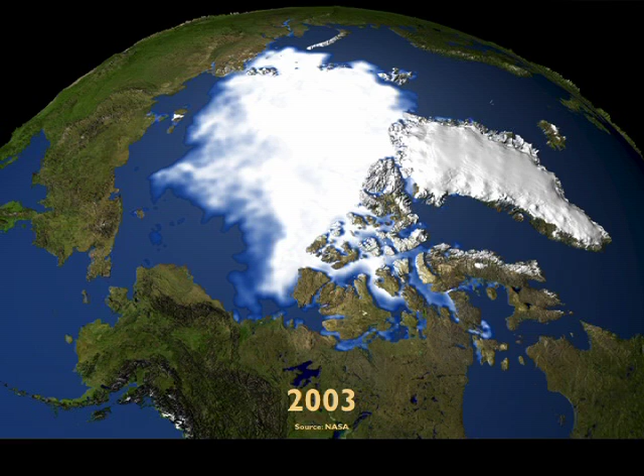It's never hurt to be aware of where we reside and the things that have happened in the last 5 minutes of the world, for which we have caused a significant amount of transformation. These are unfortunately unphotoshopped images from NASA. For many years, I didn't have the guts to actually look at a more recent image, and I haven't seen a more recent one, although I did earlier this spring look at this one here. And I'm sure hoping that this is a well-photoshopped image by Google. But it's pretty scary, isn't it?

To quote a professor of mine, Dan Janzen, MacArthur Prize winner of conservation biology, mankind won, nature lost. We've managed to actually leave our footprint on the entire globe. And at the same time, it's a very exciting time for all of us, because making us aware of the possibilities and the responsibilities that lie upon our profession is quite significant, and a great time to be alive.

We seem to have forgotten that the concept of away does not exist. Everything is here, everything is around us. We completely depend on water.

We are affecting water and its distribution on the planet at a vertiginous pace. We just don't know what's going to happen with the events three days ago in terms of the water balance around the Earth, but 17,000 planes had to be grounded because of a volcanic eruption underneath the glacier.

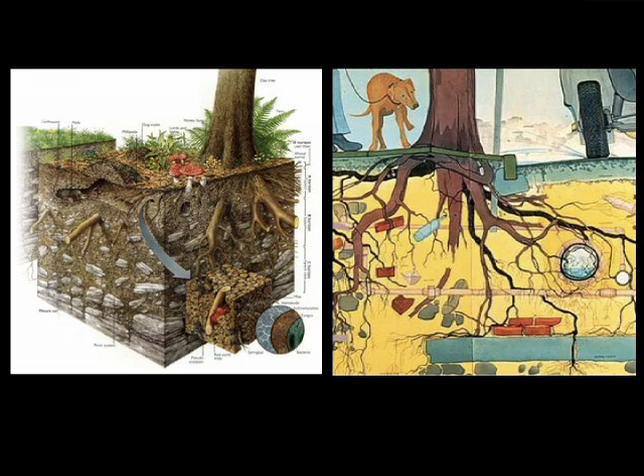At the same time, we have a significant disconnect between what that lithosphere supports, which is fundamentally most of the life on the planet, and what we do with our built environment. It's a very simple cartoon here of what we tend to see in trees, having to sustain their lives outside of this building or in our urban centers.

On the left side, we have this incredible engine of energy and recycling and production of nutrients to support life. There are millions of living parts in a teaspoon of soil, and we think of soil as dirt. We think of soil as the one thing that we can manage and move at will without regard for what happens there, and then we treat it as a commodity.

Here it is. We're selling topsoil that we've taken away from a farm, a non-renewable resource, 150 years to generate topsoil, which is what fundamentally sustains most of life on the planet in one way or another.

When we come to the building realm, in the built environment, we know buildings can do extremely well. We've heard all day today how buildings could be much better, and we know how buildings have made strides in the last 5-10 years in reducing, for example, energy use. We still have a lot more to go: carbon emissions, water use, solid waste.

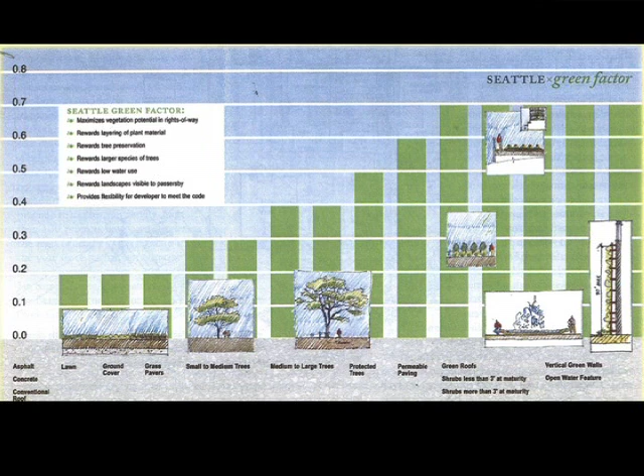There is an effort across the country to try to incorporate this idea of capturing the value of what happens outside of the buildings and making it in such a way that it becomes an incentive for cities and for developers and for architects and for the people that are capable of changing the face of the earth to be able to do better.

For example, this happens to be the Seattle Green Factor, in which the city of Seattle actually provides incentives to developers depending on the amount of green that is actually incorporated into the buildings, saving trees, providing green roofs, creating a trellis that supports vines, street trees, and so forth and so on.

It's the first movement towards trying to really develop a series of strategies that can actually contribute in some form to the definition of value for the landscapes and the sites.

You can't see this very well, but this hasn't gone unnoticed. Back in October last year, October 5th, President Obama issued an executive order asking every single entity in the government to actually pay attention to all these things.

This is an executive order that talks about federal leadership in environmental, energy, and economic performance. And if you read this, you will find out that many of the things we're trying to do with buildings and sustainable design are now part of what the government is actually asking themselves to do, setting standards that are, in many cases, much higher than current practices in our industry.

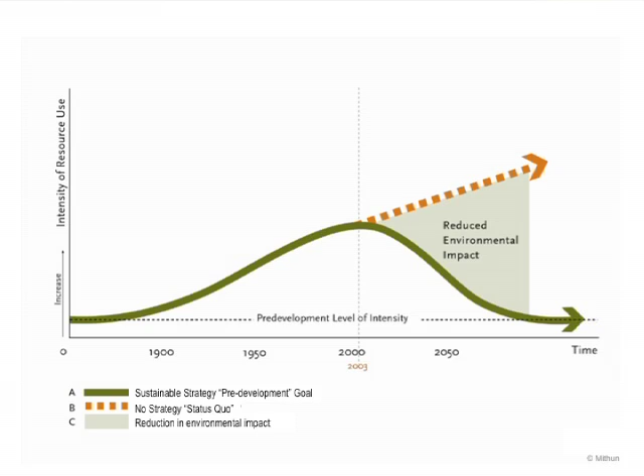So what it means is that we want to concentrate our efforts on this little wedge piece here. If we were to continue business as usual, we know that the amount of resource depletion in use is going to increase forever, and we know there's a finite amount of this. But if we were to actually look at all these reduced environmental impact strategies, we can bring that trend down. And that's where we want to focus our efforts.

When we look at a landscape, we can begin to look at it in a slightly different way. We can do our customary analysis through GIS mapping systems looking at elevation, slopes, types of soils, vegetation, and the intangibles about perceptions of the space and views.

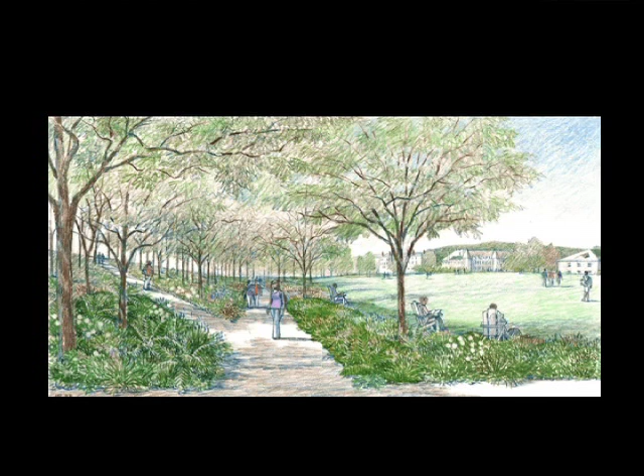We can think of landscapes as being bucolic and beautiful, or being more diverse and rich, supporting a much wider plant community and diversity, and providing different places for expansion and recreation. The Sustainable Sites Initiative recognizes that landscapes are in a position to actually capture and regenerate ecosystem services - those that nature provides for all forms of life on the planet to be sustained, occurring from mountain and polar environments all the way down to islands in the middle of the ocean. Ecosystem services can occur at any site across the globe.

And what are those ecosystem services? Well, we know about it if you read the pamphlet on the website. We have all these things that happen in landscapes that we are in a position to really capture, understand, and deploy systems that can actually replicate.

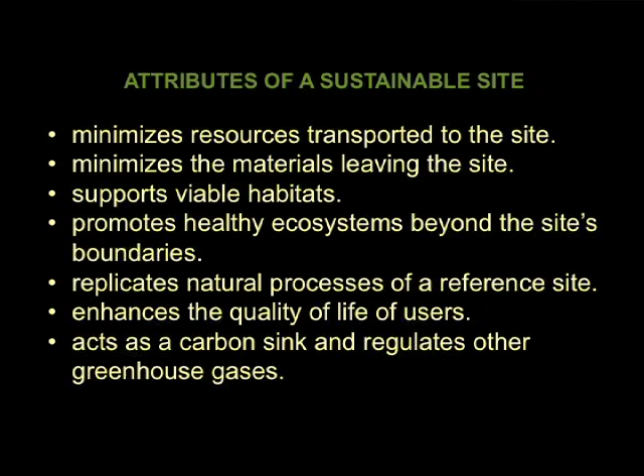So you will ask, what are the attributes of a sustainable site? If we're going to talk about a sustainable site, it will be one that minimizes the resources transported to it and minimizes the materials leaving that site - in other words, it recycles as much as possible. It supports viable habitats and promotes healthy ecosystems beyond the site's boundary, because it's not actually acting by itself - it's part of a significant web.

It replicates natural processes of that reference site in case the site has been degraded. We know what the site offers in other undisturbed places, and we can try to begin to replicate that. It enhances the quality of life of its users - there's a human component here - and it could perhaps act as a carbon sink and regulate other greenhouse gases.

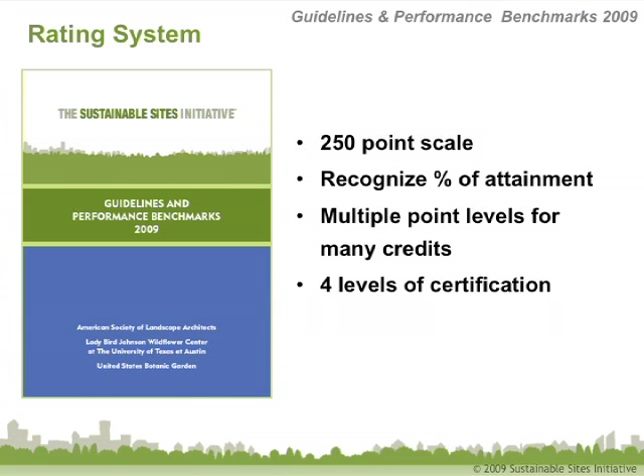So the Sustainable Sites Initiative launched a rating system for sites and landscapes back in November 2009, where there is, similar to LEED, a rating system with 250 points and 4 levels of attainment, with multiple point levels for each one of the credits.

The credits are organized in the way you conceive a project and execute it - from the early phases with site selection and pre-design assessment, through credits dealing with the design component including site design for human health and well-being, material, soil, vegetation, and water, credits connected to the construction process, and then operations, maintenance, monitoring, and innovation.

There are a total of 15 prerequisites and 51 different credits, all weighted on different scales. The soil and vegetation category, the interface between plant, soils, and water, has the largest number of credits. We went back and forth a great deal - this is the product of 5 years' worth of work, now in the pilot project phase. There are a number of prerequisites required; you simply have to meet these in order to become a rated sustainable site.

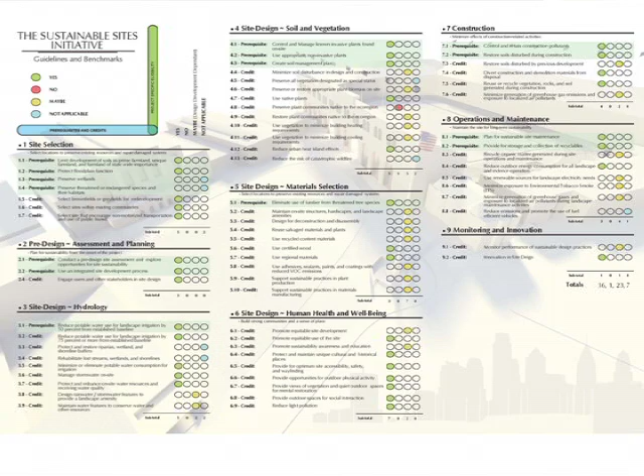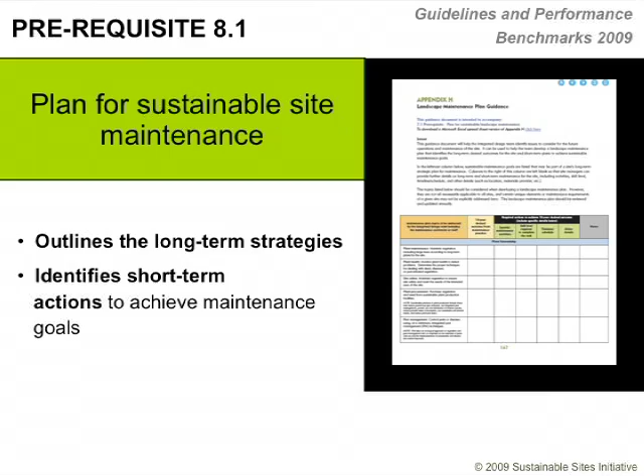So I will just briefly talk about a couple of the prerequisites and a couple of the credits, and then we'll talk about three projects: one built, one under construction, and one under design.

As I mentioned before, one of the prerequisites is the Plan for Sustainable Site Maintenance. If you go to sustainablesites.org, you can download a 300-page report with all this information telling you what you need to do, including the forms and so forth.

An interesting credit here, in terms of human health and well-being that speaks to social equity, is one that rewards projects that look at the way wage distribution occurs under the building's contract. We want to encourage that the majority of jobs each project generates remain in the local community, and at the lower levels, so we can affect the largest number of people. In this case, economic equity and social equity come together.

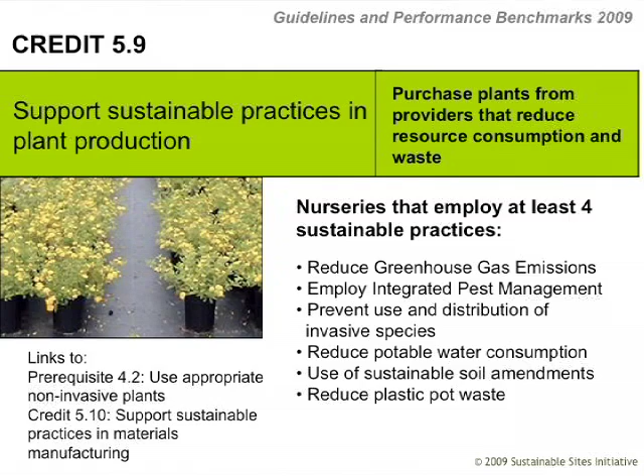At the same time, we want to make sure there's accessibility through a project that provides amenities accessible to the communities, support for sustainable practice in plant production, support for sustainable practice in materials manufacturing, and credits that monitor the performance of sustainable design practices.

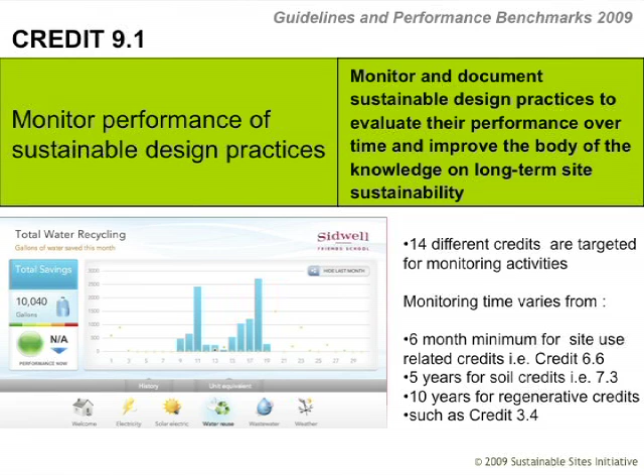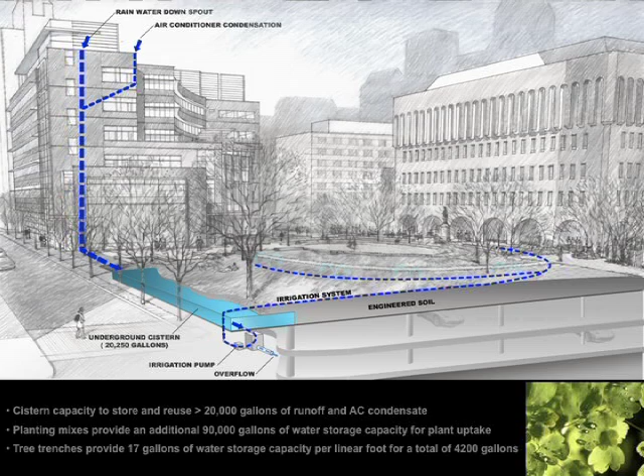What this project does is take the building and use it as a catchment, capturing all the runoff from the roof—the cleanest water on the site—along with the AC condensate, down to a cistern that provides irrigation to support all the living systems on top of this plaza.

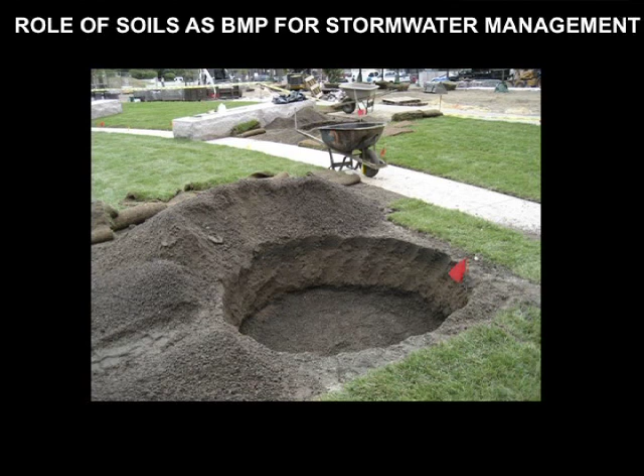It uses soils that are 100% man-made, manufactured as the best management practice for stormwater management, where we can model the amount of water retained by those soils and avoid that rainwater going into the combined sewer system, which would create problems with raw sewage discharge into the Delaware River.

Here are some photographs of the project under construction with the excavation happening, and everything from this line to the west, or to the left side, is actually on top of a parking garage.

It's designed so that it could be used at night with a tent that provides shelter for university activities, and it's used frequently by the community.

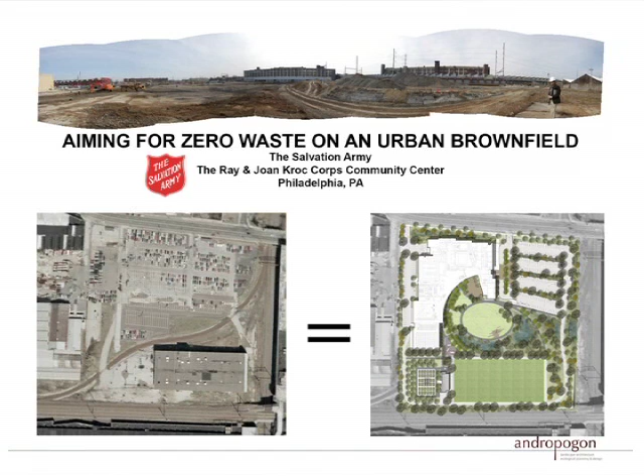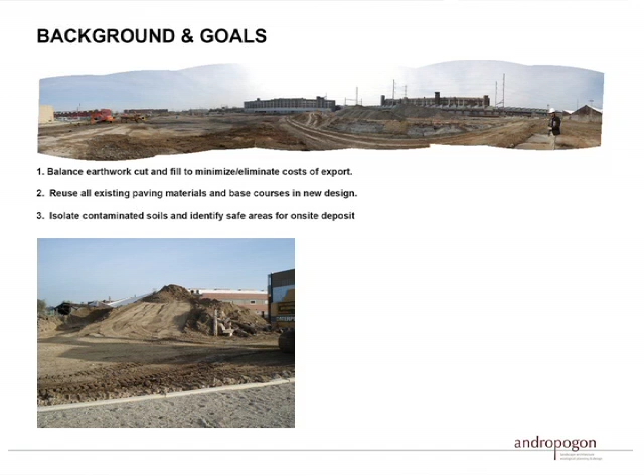Going to a brownfield, also in Philadelphia, the idea is to create a project that has zero waste. This is an 11-acre site, a new community center for the Salvation Army. The idea was to inventory everything existing on the site and try to find a way to upcycle those resources.

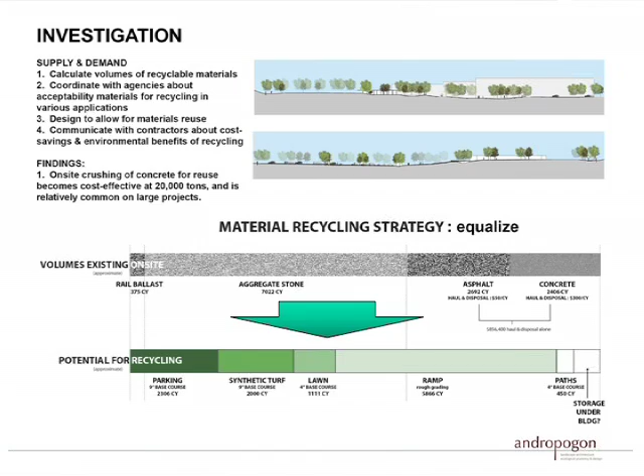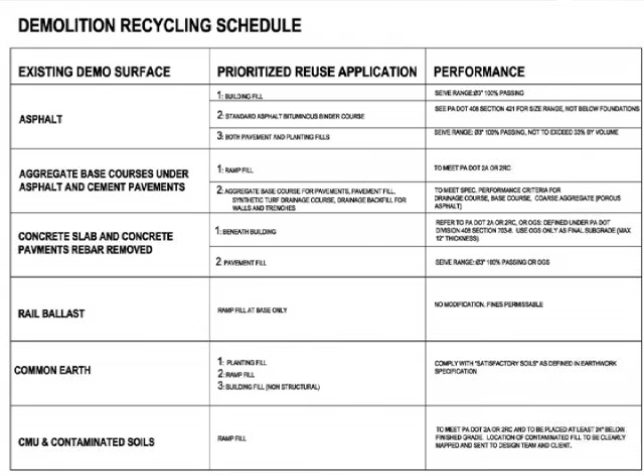So we looked at the supply and the demand, what is available, what do we need to use, and in which way the existing materials can actually become part of the new fabric of the site to support the new activities. We went through a series of strategies determining the type of recycling schedule and the standards that need to be met for the different types of operation.

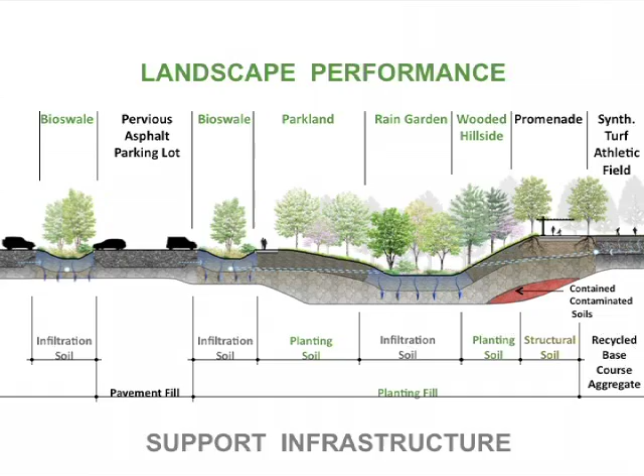Look at cut and fill calculations that you can do very crudely with yellow trace and colors, or you can be very sophisticated with computer models. Adjusting the profile of the site so we can end up with a supporting infrastructure that recycles most of those materials, which then supports a high-performance landscape that manages water and provides amenities for the site.

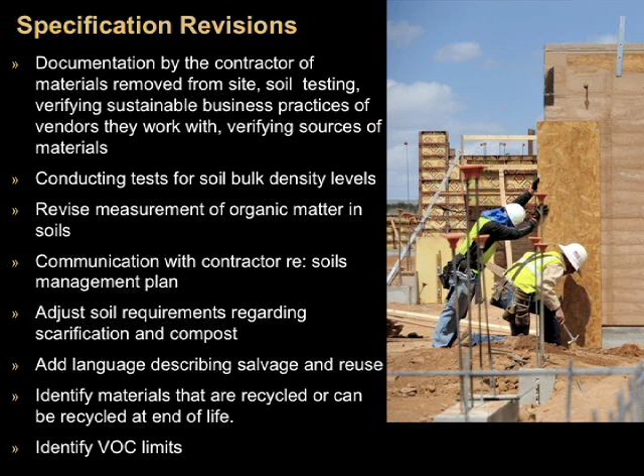And the result is that we use 100% of the materials we recycle on the site. We ended up with a very low cost per square foot, $19 per square foot for site development here. We don't know exactly the savings, but we know that we saved at least $300,000 in hauling and tipping fees for taking this out.

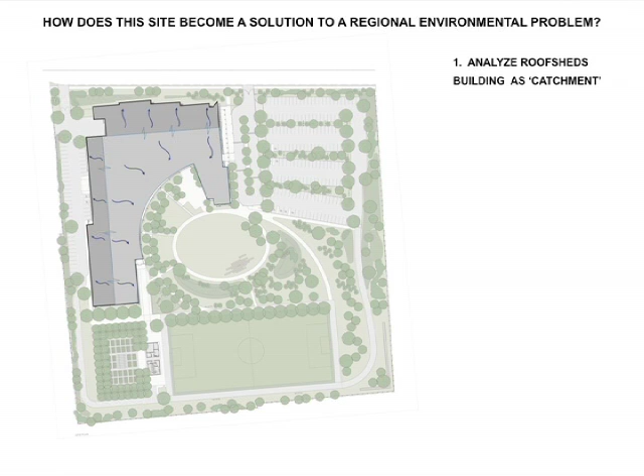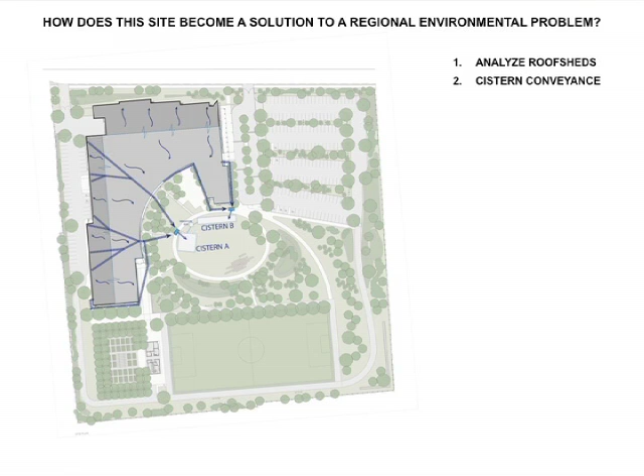So we look at the project in terms of the building as a catchment. It's almost 2 acres of roof surface, conveying that runoff through a series of cisterns that can direct that rainwater for irrigation, exhibiting that water in a series of surface runnels, so people are aware of what is happening when it rains, or aware of what happens with the air condensates inside of the building. And then that informs the entire landscape with a series of rain gardens.

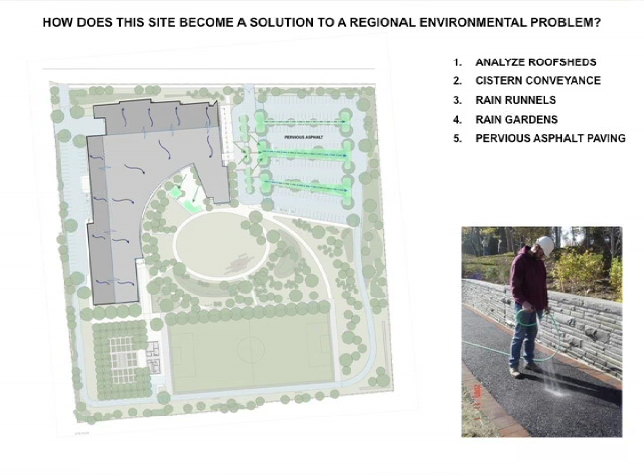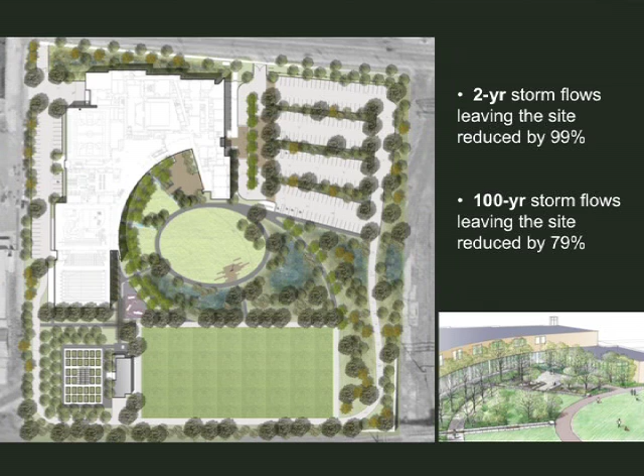And then the parking areas necessary to support this facility are paved with pervious asphalt to minimize the amount of runoff generated by the building. So 99% of the storms are retained on site for the 2-year storm or less. This occurs upwards of 92% of the time. For the 100-year storm, we reduce the flows coming out of the building, out of the site, by 79%.

And lastly, a project that is an interesting challenge is a brownfield renovation in Pittsburgh for the Phipps Conservatory. It is a project that has challenged itself to meet the Living Building Challenge. I don't know if you are aware of what this is, but it is the next level beyond LEED that is now out there for people to meet. There are 16 prerequisites - you either meet them all or you don't meet the challenge. There's no way to get points here and there. You have to meet all the prerequisites.

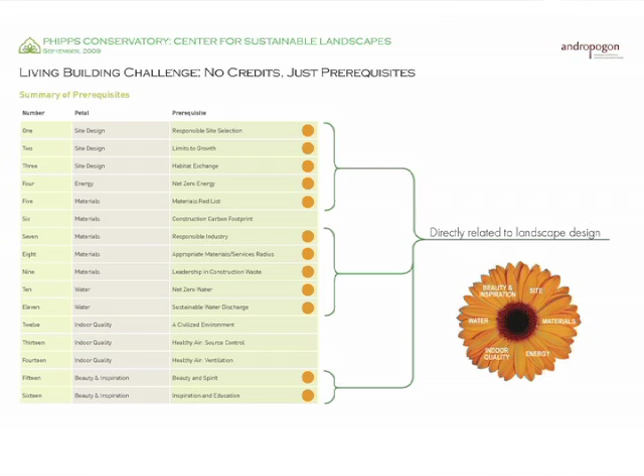And what we find interesting about this Living Building Challenge is that of the prerequisites, there are 12 that are directly related to sites and landscapes. If you look at the LEED rating system, if you obtain all the water and site credits, you can actually get a building certified - and it's sort of hidden in the background there. But in this case, this project is built on...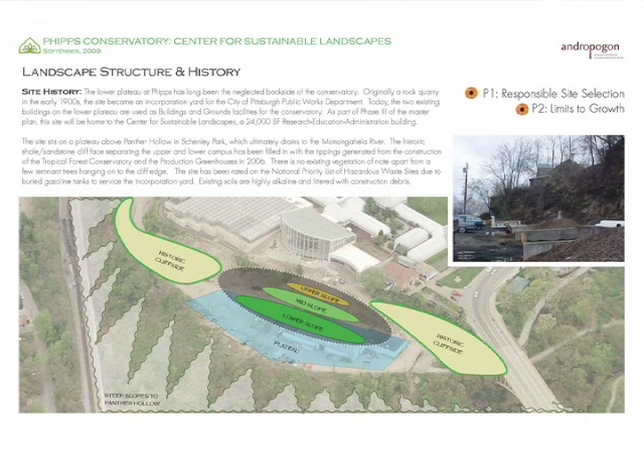This landfill, which has been used for storage in the facility. We went through extensive charrettes with users, community members, and the institution, as well as many members of the design community in the city of Pittsburgh.

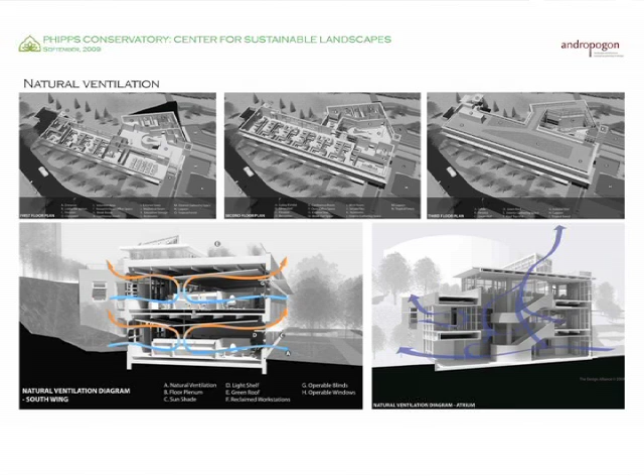We ended up with a building project that has to be net zero energy, using a combination of different energy sources, many renewable strategies with solar photovoltaic, ground coupled heating systems, where the building is being designed to maximize daylight and natural ventilation as to reduce the amount of energy consumption, where every surface of the site is actually playing a role in contributing to the...

It is a site that is completely restored from scratch, because it doesn't exist there right now, with a series of walkways to accommodate a significant change in grade from the upper plateau to the lower plateau, about 3 stories high. At the bottom of it there is a water feature that is modeled after a natural lagoon swimming pool, which you see here.

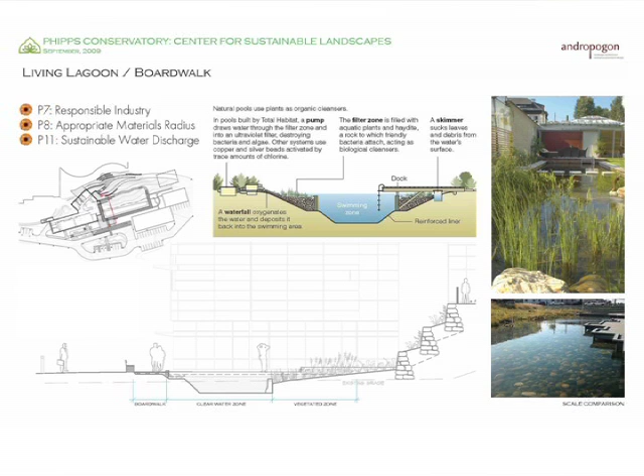All the filtration of the water is done by living systems that are hosted by plants and roots and stone media, and then there's a filtration mechanism that takes the water through all these planted reeds and wetlands and actually cleans the water.

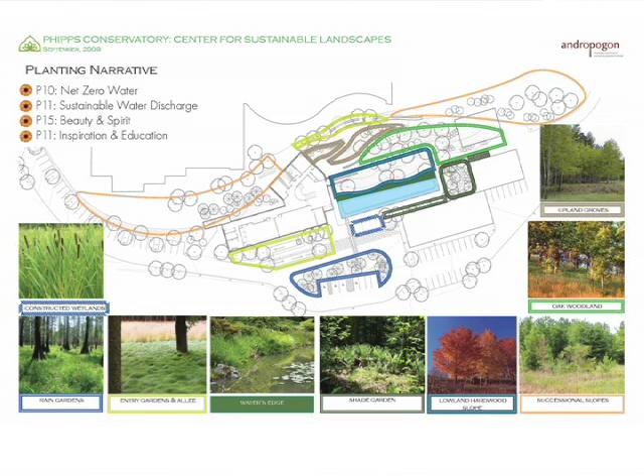This is a system that has been utilized in Europe for many years, and it's becoming more common here in the United States. There's a narrative for the landscape, where it's actually restored to appropriate plant communities depending on where they're located on the site and the performance required. To support these landscapes, we need a soil management plan, which is one of the credits we need to comply with for sustainable sites.

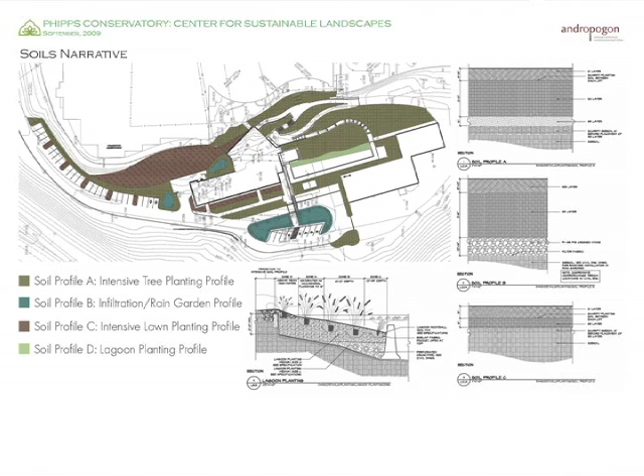This project, I failed to mention, is a pilot project for the Sustainable Sites Initiative. To do that, there's a series of areas delineated on the site with very tightly crafted specifications for performance of the soils deployed in those areas, which will be planted in different ways to support a whole variety of plant communities.

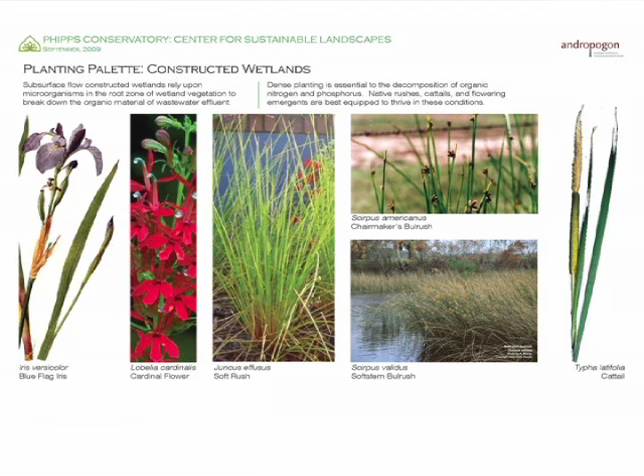This one happens to be at the water's edge, along the rain gardens, with different plant material for the constructed wetlands that will clean the wastewater, the woodland gardens, and at the ground plane, alkaline meadows—areas that are very hot and dry, tending toward high pH. In landscapes we don't talk about HP or high performance landscapes, we talk about pH, whether it's high or low, but we're all going to the same place.

Then there's this inspiration and education prerequisite that the project has to have, where we created outdoor spaces for enjoyment and for outdoor classrooms and so forth.

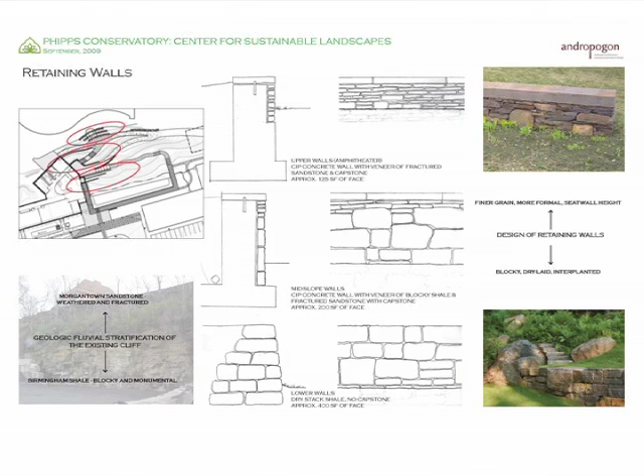One last important aspect is that we talked about the sense of place. The sense of place is about how, over the years, this site has actually developed. If you look at the way this cliff has developed, there's something very important about how the rocks are actually stratified on the site.

To reflect that, we have a series of retaining walls that actually mimic the way the materials come out of the site, from less decomposed rocks and blocky shapes and forms at the bottom, to more stratified systems as the weathering occurs. So this is only about this cliff in Pittsburgh, and nowhere else on Earth.

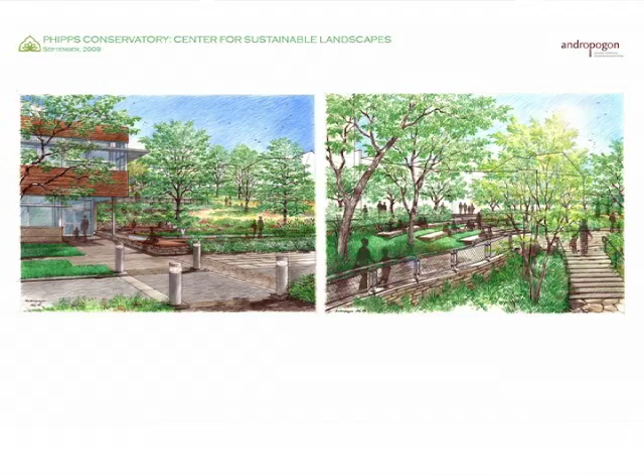Next, right? No, Jason Smith.

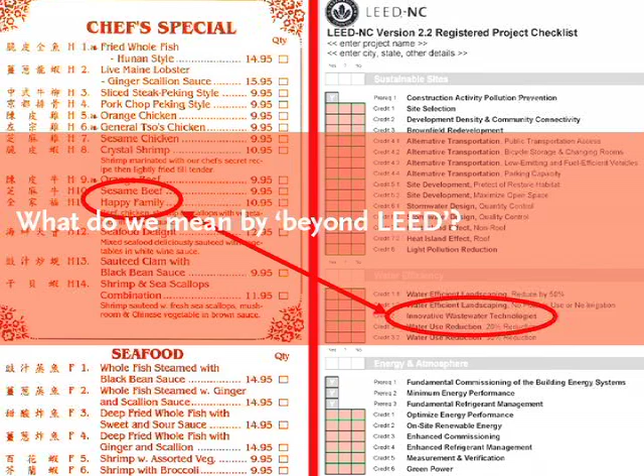So the initial question is, what do we mean by beyond LEED? I was really pleased to hear Malcolm talk about the evolution of LEED that's forthcoming. And LEED has developed, for better or worse, into an approach much like a Chinese menu. I'll take a little bit of this, and a little bit of that, and I'll put it all in a brown bag, bring it home, and it'll be called a meal.

So whether you're picking from the Happy Family menu or picking from innovative wastewater technologies, I think all of us in this room can agree that beyond this, there's a broader and more holistic goal.

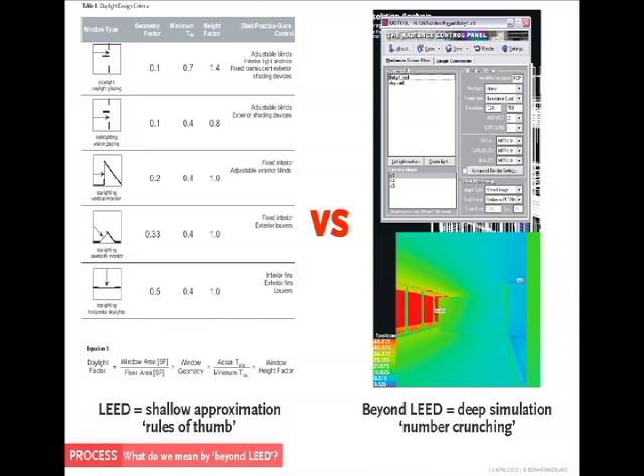Now, the way we approach that goal in our practice is that we take LEED as a starting point, and we speak about it as a good initiation for shallow approximation. And for years, for decades, for hundreds of years, the quantification of data in our profession—whether it's architecture, engineering, landscape architecture, civil design, or structural engineering—all had to do with these rules of thumb.

We all learned them in school. We all learned how a beam acts as a structural engineer, or learned similar facts in any one of those other professions. LEED takes and capitalizes on those rules of thumb in a way that makes them more palatable and more digestible. That's a thing that has brought, as Malcolm suggested, LEED and environmental design into the human consciousness on a much broader scale.

But frankly, we believe in moving beyond LEED through deep simulation. Simulation of the way our buildings work and operate is something that Steve and Dave and others can talk about on the energy side in a much more informed and intellectual way than I can. But we believe in propagating that through the early phases of design, so we try to understand the predictive elements of our behavior as designers and as building users through a series of simulations and number crunching, if you will.

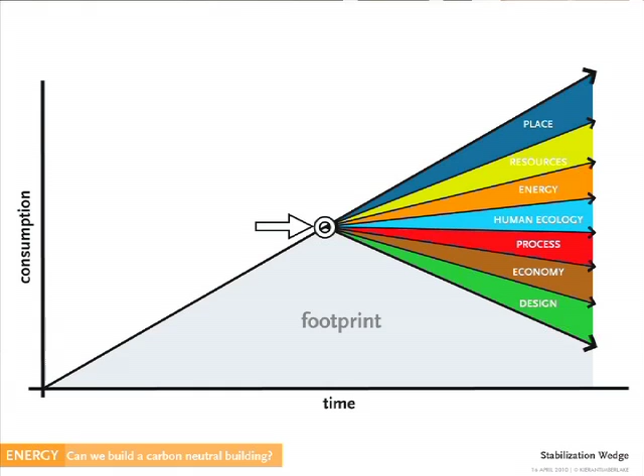So can we build a carbon neutral building? We think about this as a series of wedges. Any search towards carbon neutrality or zero energy can't be done by one thing. Frankly speaking, a building itself can't be carbon neutral. We couldn't construct a building of any sort—unless we gathered sticks and stones and piled them on top of one another without any glue, adhesive, or mortar—that was completely carbon neutral.

So one of the things we talk about is: what can we do through design? But these other wedges—place, resources, energy, human ecology, process, and economy—all bring us incrementally closer towards a more perfect and carbon neutral building landscape site.

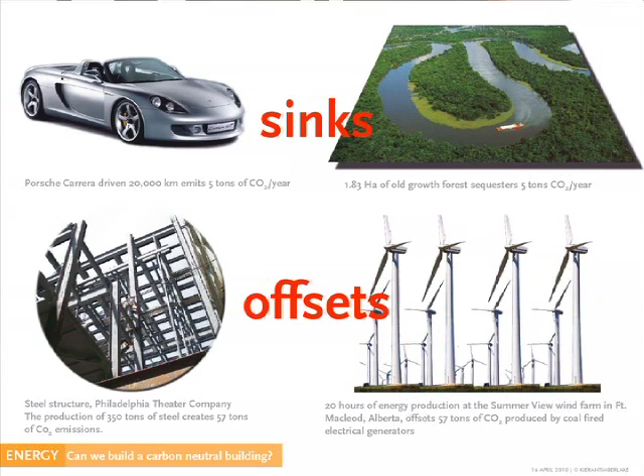Now, how do you do that? Well, one of the ways is through design. The other way is through external factors. So, a giant energy-hogging, carbon-spewing car like the Porsche Carrera essentially emits the same amount of carbon dioxide as we can sink in almost a 2-hectare swath of old growth forest. Is that something that's really sustainable for us? Is it sustainable for us to drive those kinds of cars? Is it really sustainable for us to offset those sorts of things, to sink those sorts of things?

At the same time, we look at a structure from a project we did in Philadelphia, and the production of the steel structure, which in our area of the country, like most areas, is done by coal-fired plants. How do we offset that with off-site usage? How do we look at what it takes? So 20 hours of energy production in a wind farm is actually something far more attainable in our current environment than starting to dedicate old growth forests to sink carbon. So we start to look at these as a multiplicity of strategies.

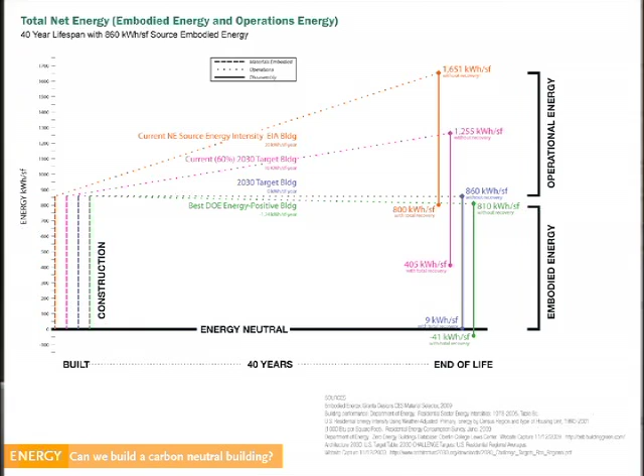Now, how do we do that in the built environment? Let's just say, like others have today, that we're going to design a building that's going to last for 40 years. The building in and of itself has this much embodied energy in it. We can improve on it. We can use lower embodied energy materials, lower site process materials that use less energy, and we can transport less. But we're still going to get to a point where we're never going to be able to build a building that doesn't have X amount of embodied energy in it.

The rest of this, with various benchmarking attached to it, is all about how well your building performs after you sink all that embodied energy into it. Is it a zero net energy building? Does it give back to the grid? Is it just an average building? Does it hit the 2030 target? These are various ways that we can quantify how our operational energy builds upon our embodied energy.

But importantly, and this is something most of the building community doesn't reflect on, is how do we recover that embodied energy at the end of a building's life cycle? It's something our practice has been really focused on, and it routinely builds for folks like Dartmouth who want buildings that last forever. We still ask how do we recover that energy, because we'll never get to what we call energy neutrality if we don't understand how to recycle, repurpose, and reuse buildings and their constituent parts at the end of their lifespan.

So operational energy is really only half the problem.

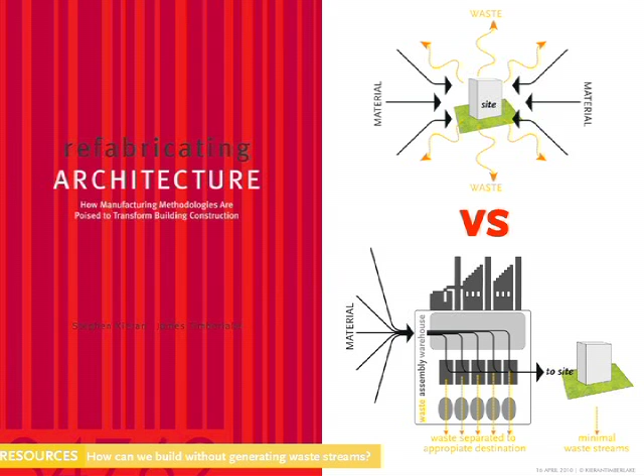So we wrote a book about this that reflected on other industries far less primitive than building design and construction—industries that, for economic circumstances or for the sake of their very survival, found new and better, improved ways to build. Almost universally, those industries built in one way: they haven't built with pieces and parts, they've built with larger scale modules. Some industries call them chunks, some call them modules. It's an approach that in the last decade we've sought to understand as it pertains to buildings.

What it means is that in a conventional building construction, all these different things come to the site—in all sorts of trucks, all sorts of dollies—people unload and offload them, and then all this waste goes out of the site. It's a completely uncontrolled environment, even in the best of circumstances. So we seek to adopt the methodology that the airplane industry uses, the shipbuilding industry uses, and other vertically integrated industries use: bring the materials to a centralized location, control the waste, and control the streams that move off that location in a much more elegant way.

Now, if we build buildings and design landscapes, we're never going to be able to do that inside a factory vacuum. But what parts of the building, what parts of the landscape, can we contain in a way that's highly controllable and minimizes our waste?

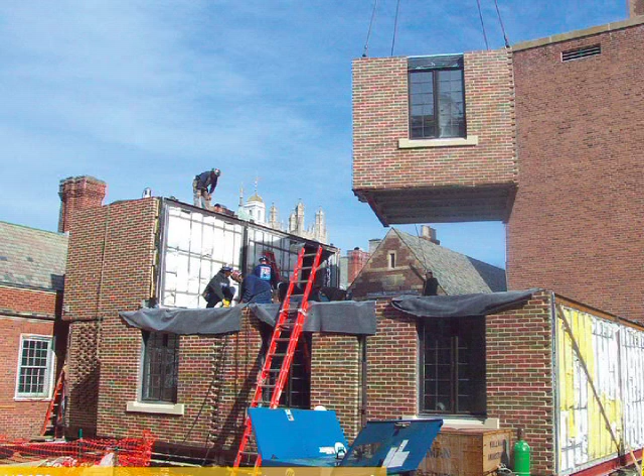I included this slide to make everyone aware that this isn't just tin buildings we see outside. We've had the privilege of working with institutions that want to push this far enough—and I should recommend this to Dartmouth—that actually brittle masonry buildings can be built this way. It's a structural steel frame imported in large chunks, and the building pieces are knit together, as at one of the other Ivy League institutions.

The other way we do that is how do we do it locally. As practitioners of the art and science of architecture and design, we're used to going through a catalog and saying, I want this, this, this, and this, and we don't really know where it comes from. Well, how do we integrate that, and how do we work with our clients?

Jose and I have enjoyed a long and collaborative relationship on projects at Middlebury and elsewhere. For folks like Middlebury and Dartmouth who are looking out more broadly at their own land holdings, we understand that we can be using those things inside the building.

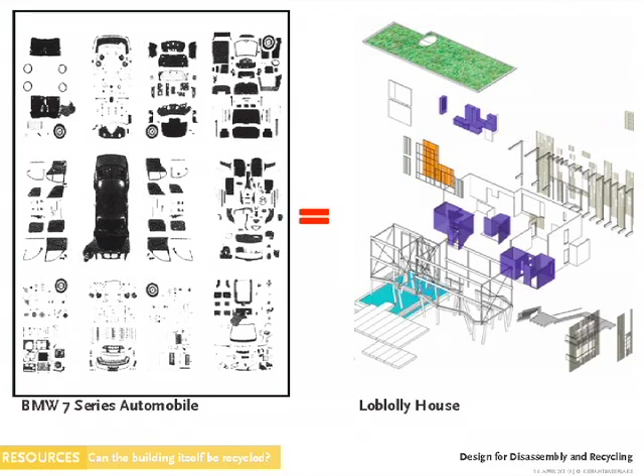And then finally, again, how do we look at the building itself being recycled? How, in the end, do we understand that the building itself can be recycled, and we can grab back the embodied energy that's gone into the building and not just minimize the operational energy?

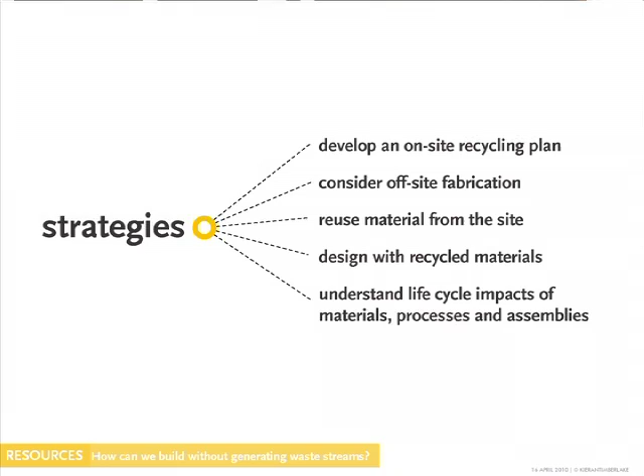So many of these strategies are going to be familiar to folks: developing a recycling plan, considering off-site fabrication, because it dramatically reduces—by 80 plus percent—the amount of waste that comes out of a construction site, reusing materials from the site, as Jose mentioned, designing for recycled materials, and then understanding those life cycle impacts. Important question that we ask all of our clients: what do we mean by here?

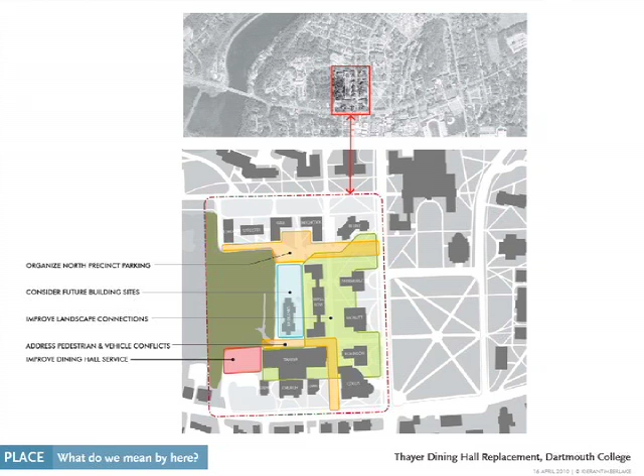So the first thing is, where is the climatological data, and what can it tell us about what we can do? For a project we worked on in an earlier edition of the Thayer Dining Hall, we started off with Jack and others' assistance looking more widely at the precinct, looking at the larger swath of New Hampshire and even Vermont that the college occupies, and then developing that into a precinct plan so that we could identify not only the typical architecture and urban plan issues that you see highlighted here.

But also relationships in and among the entire campus network. So how do we define here by that? And then when we started—

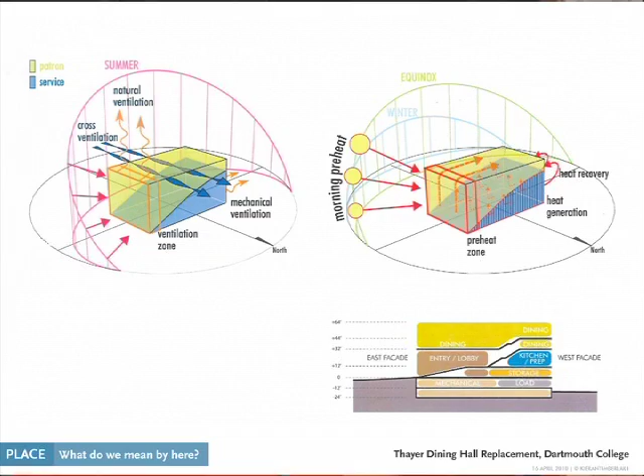Programming the building, we quickly came to an understanding that we could hybridize the program together with the environmental data, together with the sense of place. And so in a pure stacking diagrammatic way, we knew that we had a building, to use Dave Madigan's terminology, that'd be a big energy hog.

Thayer, even the most improved Thayer Dining Hall, is still going to use a tremendous amount of energy to do what it has to do.

But we looked quickly and rigorously at how we might develop a stacking diagram to suggest that the orientation of the building and the constituent program of the building, and the climatological data that we knew about here in Hanover, quickly suggested that before we came to a building design, we knew programmatically what we had to do in order to organize the building.

As an example, we knew that during the summer, we would need to seek shade, because in the early part of the day the building would face the intense eastern sun, while in the winter, we wanted to try to capture that heat.

So the design of a thermal transfer wall that would be a modern improvement on the classic trombe wall—one that would gather the heat in the winter and release it to the building, and gather the heat in the summer and release it to the atmosphere—was the initial starting point.

The programmatic stacking diagram allowed us to take heat-generating spaces, i.e. the kitchen, and stack them below heat-receiving spaces, at least for most of the year. That also allowed us to develop a symbiotic relationship where one part of the building generating a tremendous amount of heat is feeding another part of the building that wants to receive that heat. So we try to do that as part of the early and pre-design effort.

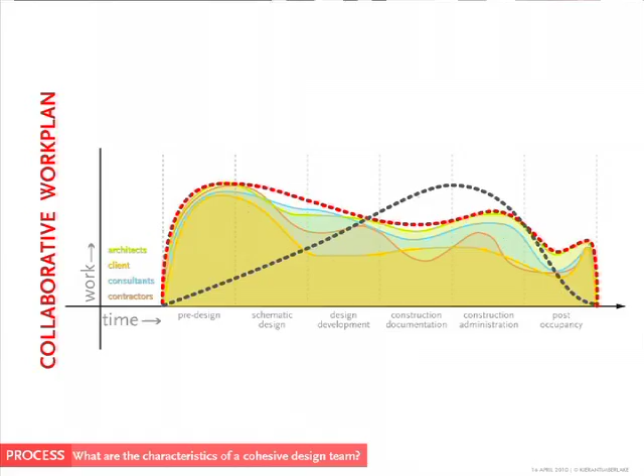Everybody is trying to work at the very last minute to try to get a building designed and constructed. We propose a paradigm that's much more in equilibrium, in which architects, clients, consultants, contractors, and all other user groups are fundamentally drawn together at the beginning of a process, in that pre-design phase, to work in a participatory manner, so that the hump in the curve is not back here, but here.

And then the net benefits of that accrue to the rest of the project. So front-loading work in the front part of the process is integral to the approach.

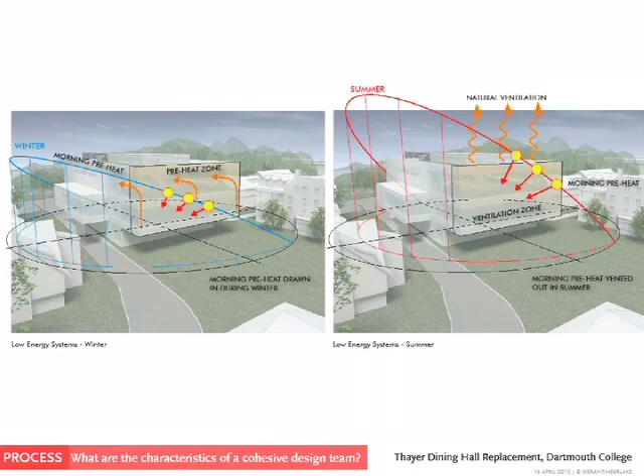So how does that work in the same Thayer project? Well, we knew that we had an opportunity to use this preheat zone in a passive way in the building, but we also knew that the building would be filled with active systems. Like science buildings, the reason these buildings are so energy consumptive is because you have air that's constantly moving through them to evacuate the kitchen and hood equipment, especially in a large dining hall.

So we worked with Dave and others to try to understand how we might use those same strategies I talked about, but in a way that was more broadly distributed through the building system. We were tremendously excited about this building to be able to accomplish a dining hall with operable windows. Sounds simple, but it's not something that's done conventionally, because of the air requirements and because of the temperature control requirements.

We also, much to the chagrin of some at Dartmouth, built a vertical building and tried to take advantage of the natural effect, both the stack effect and the natural ventilation effect, in order to bring this building into a full ecological circle that includes human ecology.

So we exchange information with our consultants in that way early in the process and often in the process. We seek to develop long-term relationships with our clients and with our consultants. And I think all of us on the design side here understand the value of that, not only economically, but also from a project teaming respect.

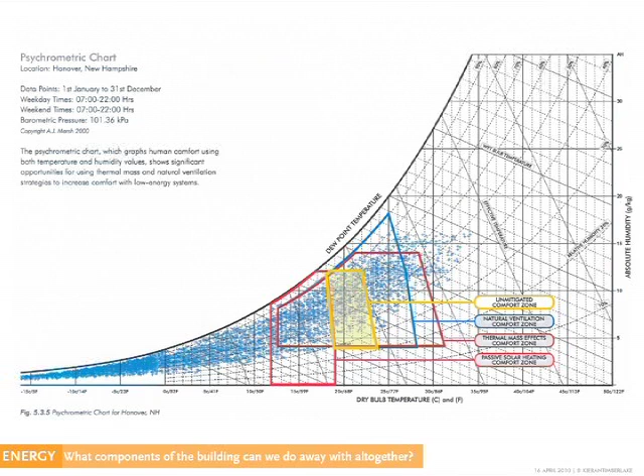Similar to psychrometric data, in this case from Hanover, you can see most of the time is in the heating zone, and most of the passive and active strategies that are low energy can capture most of the temperature comfort data points. But what happens when we extend that out more broadly?

These are buildings that, under normative conditions, because of Middlebury's really active and world-acclaimed summer language program, have air conditioning as a de facto circumstance. They're bringing people from all over the world, including people from much colder areas and much hotter areas, and putting them together in an environment that's essentially sealed from the outside in a Middlebury summer.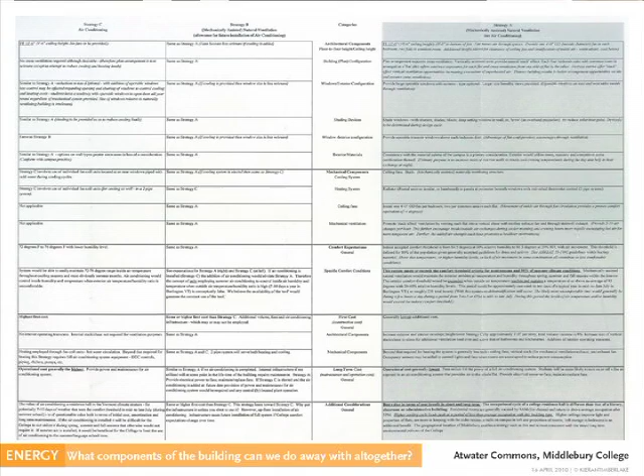So we started to ask questions about how we can improve on that, and whether we can do away with this fait accompli that was air conditioning, and how to do it in a way that is exhaustive in terms of its research, but also appropriate in terms of the user group.

So simply speaking, we started with an argument about spatial economy. All of the room that air conditioning in these buildings takes was costing X amount of dollars and X amount of energy to run. We developed a simple sectional diagram that didn't have anything to do with the plan of the building, but realized that flow-through natural or mechanically assisted natural ventilation would be spatially much less consumptive than any diagram that includes chillers and air handlers and the ventilation requirements.

We then designed the plan of the building to reflect a flow-through ventilation system so that these ensuite arrangements can be opened in a cross-ventilated way.

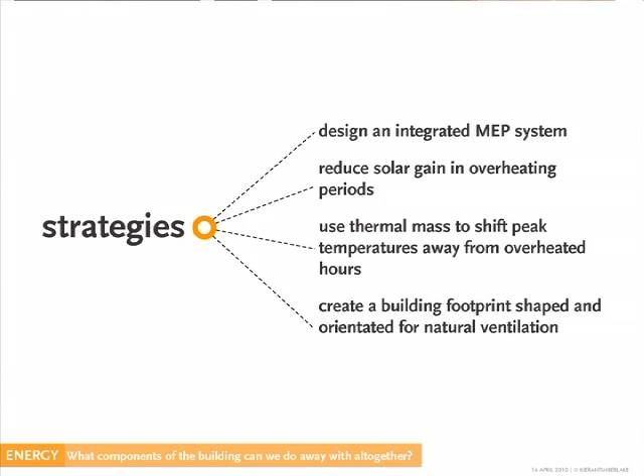So speaking of that integrated design, the MEP system doesn't always have to start with the things that you know. It can oftentimes start with the things that you don't know. The more practical things about reducing solar gain, using thermal mass, and creating a building footprint shaped and oriented for natural ventilation are things we've forgotten as a design profession. Simple strategies about orienting buildings and the systems we use are things we're bringing back to the fore.

How do we measure that performance? Here's a simple diagram that the folks from SLC will probably be familiar with: standard practice, which we're trying to get away from, best practice, advanced practice, and then cutting edge practice, or you might say regenerative practice.

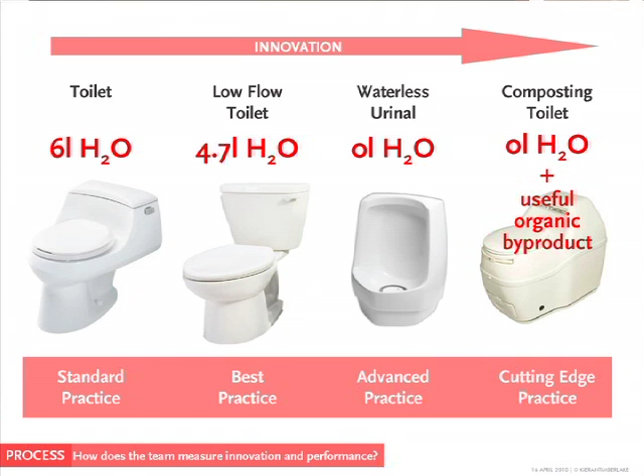And in order to measure that, we use tools that are not sophisticated to many of the user groups here, but tend to be fairly straightforward from an architect's perspective.

This was another piece of the Middlebury project where we were trying to identify the backup wall system. The folks at Middlebury were concerned about issues of condensation as they related to a structural steel and infill stud metal frame, so we designed an elegant analysis and a supremely inelegant analysis.

The elegant analysis was done by architectural testing in York, Pennsylvania, and it modeled the dew point, condensation factor, and temperature profile of the anchors, which happen to be those Fero anchors that Jason mentioned earlier from Canada.

And then in our own very primitive way, we sought to improve upon that by actually insulating the anchors themselves. So, looking outside the box, from a tool set that suggests there's one set of data, but then from a model set that suggests there's a second set of data.

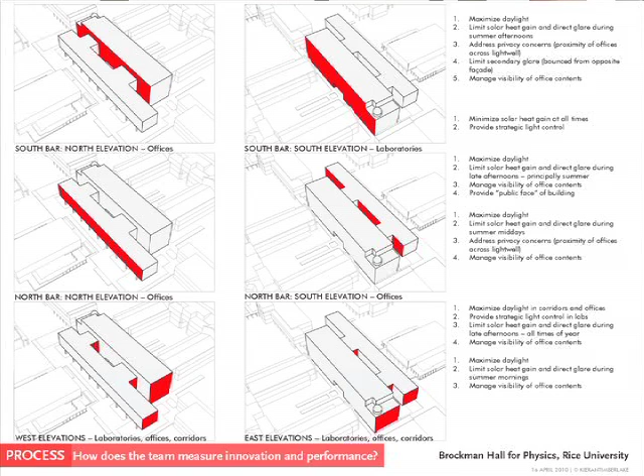Similarly, for a project I'm working on in a very different climate in Houston, Texas, we look at the building facades both integrally and individually, and set goals for each facade. In the same way Jason talked about the window-to-wall ratio, we're looking at other issues about how to construct each facade and the entirety of the building envelope in a way that's comprehensive but tuned to the local microclimate.

So we use all sorts of different tools, some sophisticated, some primitive. We measure on multiple scales. We use science, or as close to science as we know, which is to say we put out a hypothesis and then try to go about experimenting and proving that hypothesis before the building is built.

Others will come along after the building is built and be able to prove whether we were good or bad about energy intensity. But testing that hypothesis before you actually get to it is really, in the true sense, experimentation.

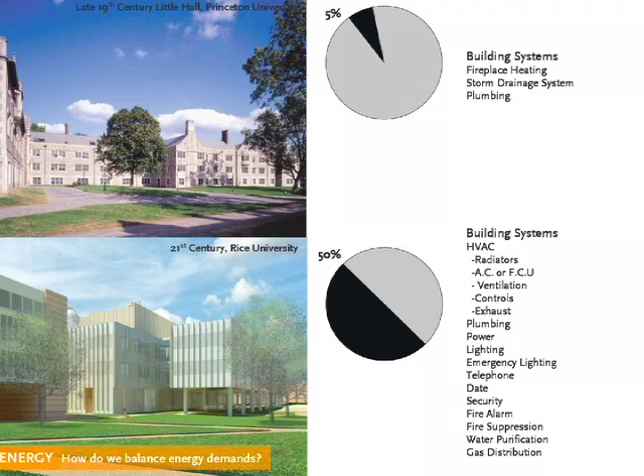And then how do we balance energy demands for large, very energy-intensive buildings? Like your life sciences building here, we know that building systems are no longer a small portion of what they were when most of these campuses were built—actually they're the majority of the building systems and components. So we look at basic strategies we all know and love: VAV systems, VFD systems, and clustering space by conditioning requirements, and we take that as a given.

So we cluster the building in order to put the opaque, highly sensitive, highly temperature-controlled labs in one part of the site, and the daylit, much less temperature-controlled offices in another part of the building. And then we look at more broad-based cutting-edge systems, like desiccant systems, and other systems that come from other more advanced building societies.

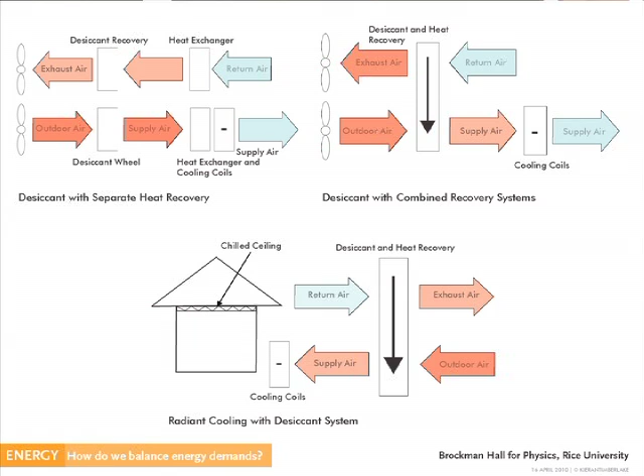And then we try to stuff them all into the building, right? And this is one of the most difficult parts: how do we predict accurately how much space we're going to need for all this stuff?

So this comes from our Revit model of the project in Houston. And most of the engineers and contractors on the job site are wildly proud to proclaim is one of the largest air handling units ever to go into a building in the state of Texas. And that's shown right here in red.

The important part, the germane part to our discussion, is that pretreatment unit—the unit that does 80% of the bulk dehumidification in this very humid, very hot, very solar-intensive climate—actually reduces beyond what we could do with a more distributed strategy using several smaller air handling units, by about 30%. So the inversion of what we think—bigger equipment, more expensive equipment, more energy-intensive equipment—in this particular case has proven out and is proving out to be more efficient.

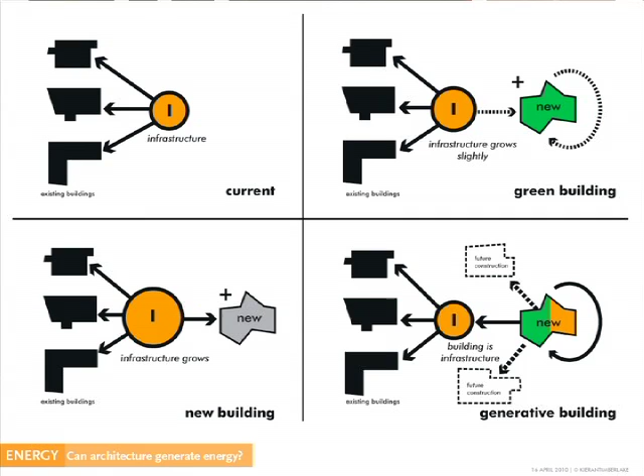So how can our architecture generate energy? Right now the current methodology, we have infrastructure, it feeds buildings. This is a campus much like Dartmouth. We look at a green building, which is built a little better, and the infrastructure bubble grows slightly. Well, down here we look at another version in a new building, which is more conventional. The infrastructure grows less slightly and more comparable to these.

And then we look at what we might call a generative building—a building that might generate electricity or other resources and feed back in.

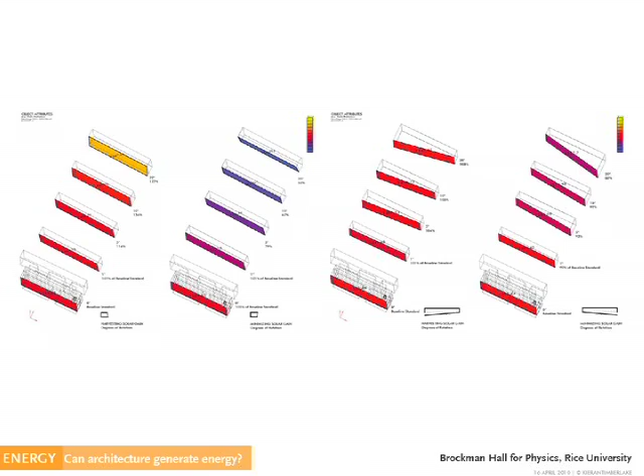And so similarly for the project in Houston, we looked at opportunities for wind power, and we looked at opportunities for solar power. Remember, we did this with a multiplicity of tools, common software that are available to test, for example, whether we wanted to reject the solar load from this particular building or whether we wanted to adopt it and use it within the building.

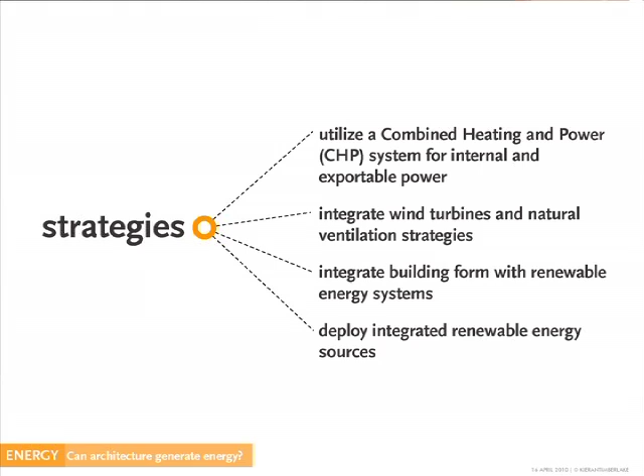So strategies that might be applicable there: utilizing CHP, utilizing wind turbines, integrating the building form with renewable energy systems—i.e. turning the part of the building that wants to receive solar gain toward the right location and the part that wants to reject it toward another location—and then deploying integrated renewable energy sources, not just ones that are tacked onto the building, but ones that are integrated.

I'll finish up briefly by talking about process. How do we imagine this building as an experiment? How do we do the things on the front end that hypothesize and prove out that science, and then how do we monitor the building afterwards? This is an area where the research arm in our practice is really investing heavily.

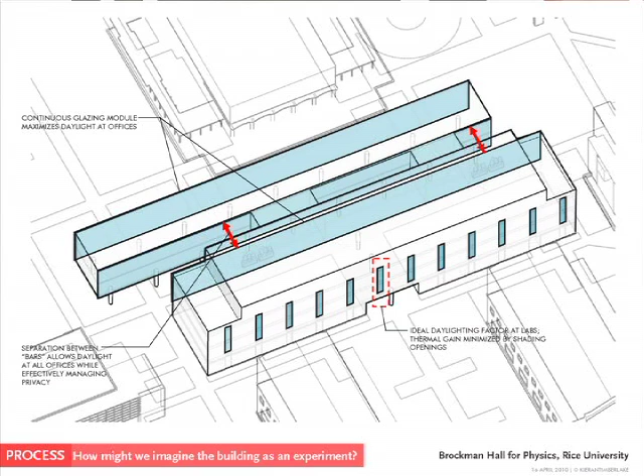And how do we monitor buildings after they're existing? Not the conventional building automation system things that most people here are familiar with, but other issues. So for example, that 2-bar building at Rice—how do we take the building and know where we use daylight, but then monitor the incident daylight in a way that helps us reform the systems, and in this case, helps us understand in a predictive model how we might generate a self-shading facade.

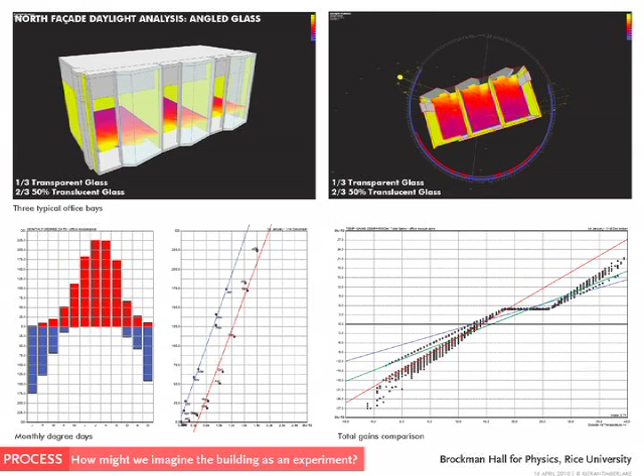And then as a corollary, how do we take that energy—and if, like the institutional decision was here, we're not going to invest in photovoltaics because of the low price of electricity generated on their campus—how do we then creatively reject the heat from areas that don't want it?

Looking at a multiplicity of strategies for doing that, taking the incident solar radiation, and then testing that out through a series of mock-ups early in the design process that determines whether or not this is going to prove out. This happens to be a terracotta system, which our most simple analogy is that it acts like a radiator—it absorbs solar energy, then it reflects back solar energy before it enters the building. It's a nested rain screen assembly that has double redundancy in terms of its water shedding technology.

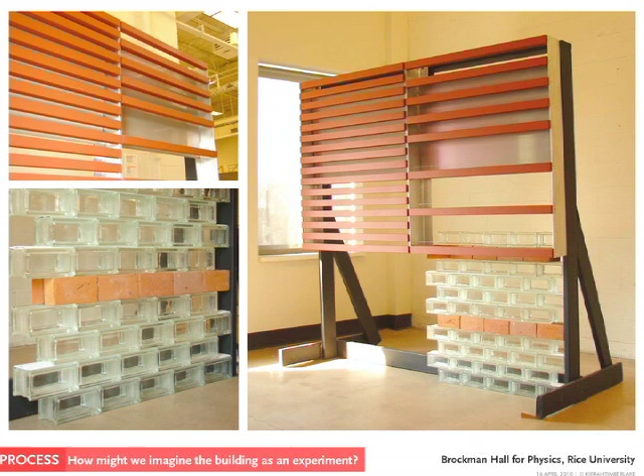And importantly, we build it, and we build it early. So this is an early mock-up that we did in our office. And this is the on-site mock-up. This mock-up is forming not only the basis of design for the project, but also undergoing a series of solar studies with sensors placed in it so that we can be accurate about the predictive behavior of this particular facade.

So we look both forward and back. We develop those criteria early on for what is acceptable on a cutting-edge fashion and what really is bleeding edge. We try to innovate, we invent, we really don't look in magazines.

We collaborate. We combine art and science in the best way that we know how. We combine intuition and analysis in the best way how. And this is one that we like to talk about because it's important to us.

When we're going to fail, and we will fail, we all fail at these building projects, but we want to fail early. So we set up those predictive models, whether they're electronic and virtual or whether they're pragmatic and real, to fail early in the process and fail quickly in the process so that we have the opportunity to recover and initiate and integrate the systems that are appropriate for the building.